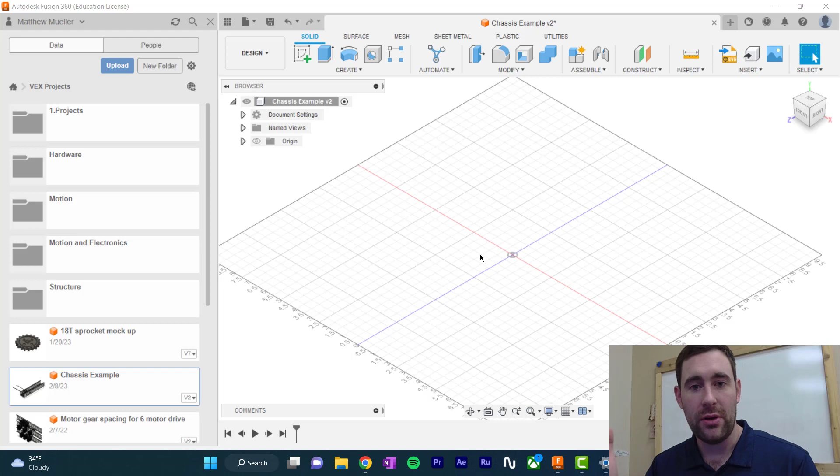All right, so I've got a blank design document here. In this document, we are going to build a basic chassis, just one side of a chassis. The process we're going to go through is we're going to put the structure down first, then add bearing flats, followed by axles, gears, and wheels, in that order. We're going to do that for each wheel on the chassis because this chassis is going to have two wheels. So to start things off, I'm going to start by grabbing my structure.

In my Vex project here where I have all of my metal, I just jump in, grab structure, go to C channel, and your formatting might look a little different than mine, but it's important you have it organized somewhere. I'm going to grab some aluminum 5 by right here, 5 by 35. That'll work. Now I just have to click, drag, and drop.

Okay, so I've dropped it in there. I'm going to move this around here a little bit because I just like this orientation. I'm going to put that part right about there, and hit enter. Now this is going to be my very first part.

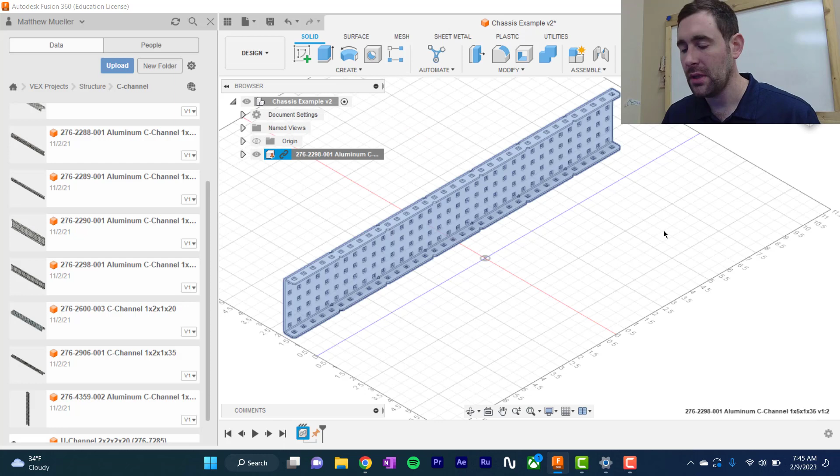Everything else is going to be kind of linked off that part, so I want to ground it. What that means is I'm going to lock that one into position. To do that, I'm going to go into my browser, right click, and go to ground. Now this metal piece is locked in, so if I grab it and move it around, it won't move.

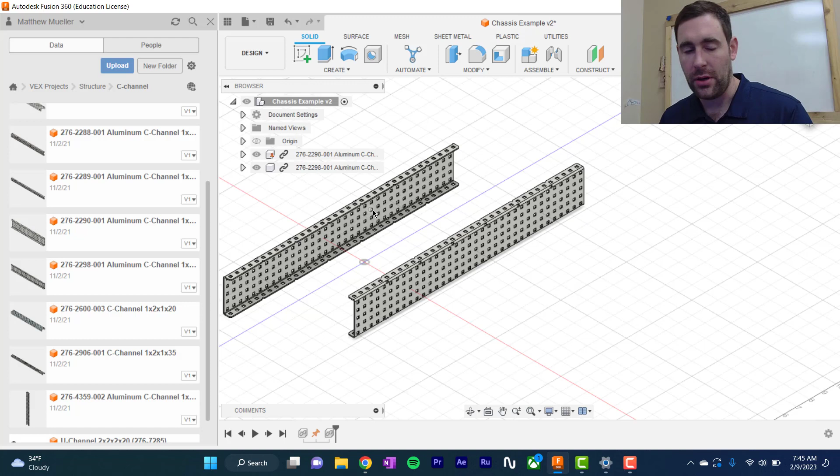If I bring in another one here, again I'm just dragging and dropping from the data panel. I'm going to bring that over here and rotate it to 90 degrees. There we go, looks good. Notice I can just click and drag and move this around—that's the difference between a grounded part and a non-grounded part. So it's always good to have one grounded part so positions aren't moving all over on you.

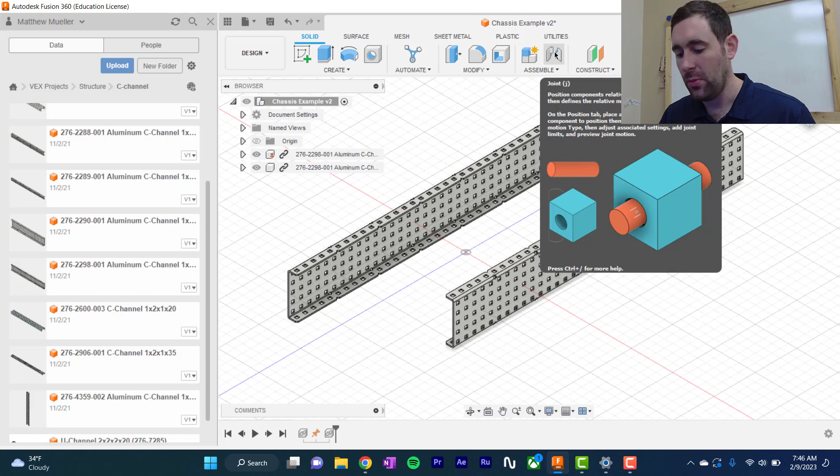All right, so now we need to start putting them together, and this is probably the most important part of the video. To attach two pieces together, you use the joint command. Joint can be found right here, or you can press the J key on your keyboard. I tend to use the keyboard shortcuts all the time—pressing the J key works really well. So I'm just going to press J, and it automatically brings me into joint mode.

Now, in joint mode, the first selection is going to be your piece that moves, and the second selection is the piece it snaps to. So it's always important to select the piece you're moving first. Here I'm going to move this other piece. I'm going to select right here, and notice we have all these little white spots pop up—those are anchor points that you can then match your joint to.

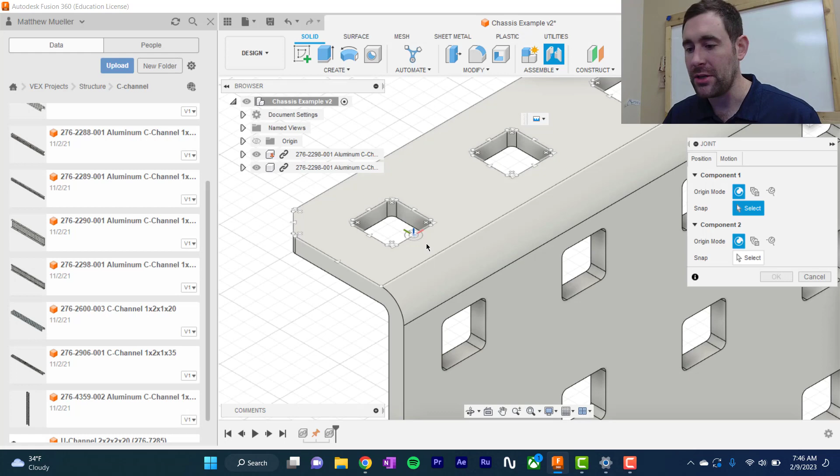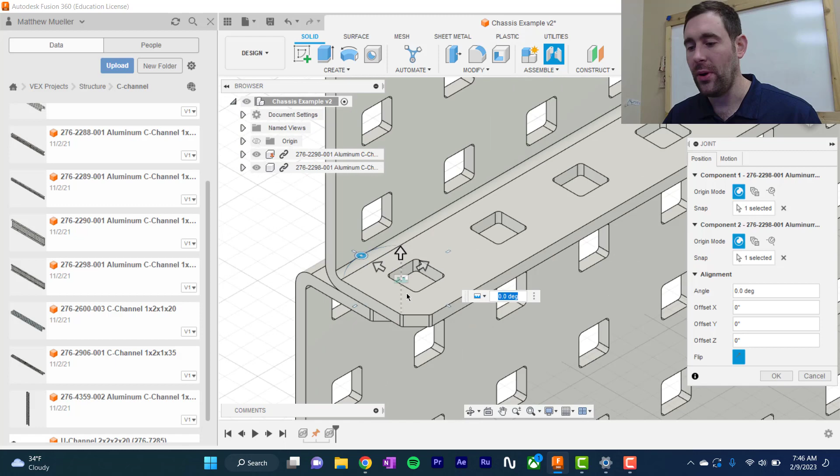I'm going to select that one right there, and it does take some really precise mouse movement, so make sure you zoom in when you do that. So I've selected there, and then I'm going to come over here and select the same kind of spot—we selected the backside here, so I select the exact same spot in reference. The reason I do that is so that when I flip it over, by clicking flip component down here, they line up perfectly. If I orbit around, notice those holes line up perfectly. That's what I want—when they line up perfectly like that, now I can start moving my joint.

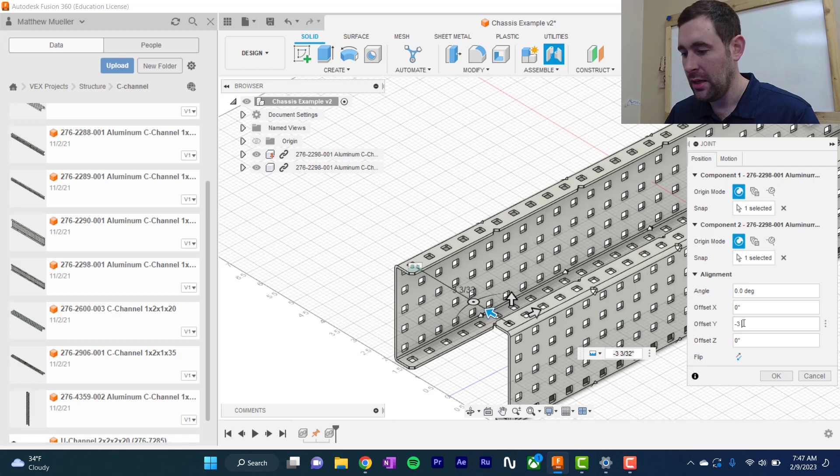Now, when I build a chassis, I need some space there, so what I'm actually going to do is spread these apart, 3 inches. You can just drag it until this gets to 3, or go in here and put 3 inches—I'm doing mine in inches instead of meters here. So there you go, I've got two pieces linked together. Now notice if I click and drag, this one doesn't move at all anymore because it's locked into that grounded part.

Okay, so the next step here, we need to go and grab some bearing flats. I'm going to go to my motion—wrong one, other motion—and go to shaft hardware.

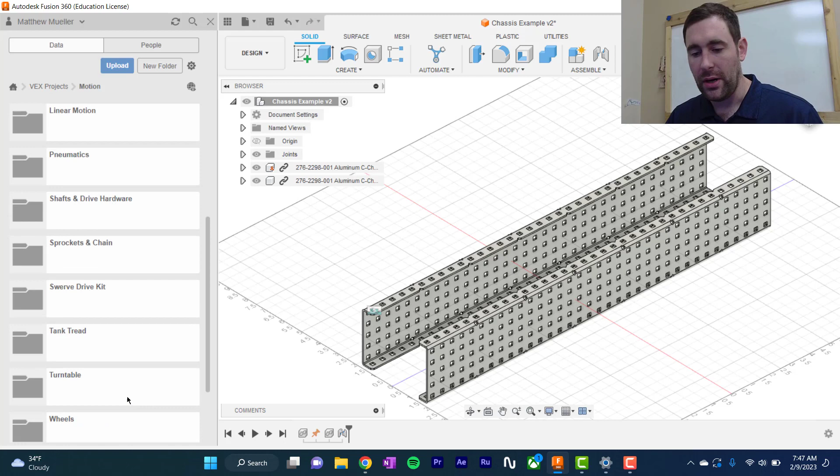And if I let it load and scroll down here a little bit, I will see my bearing flats. That's my narrow bearing flats. We want the standard bearing flats. There they are.

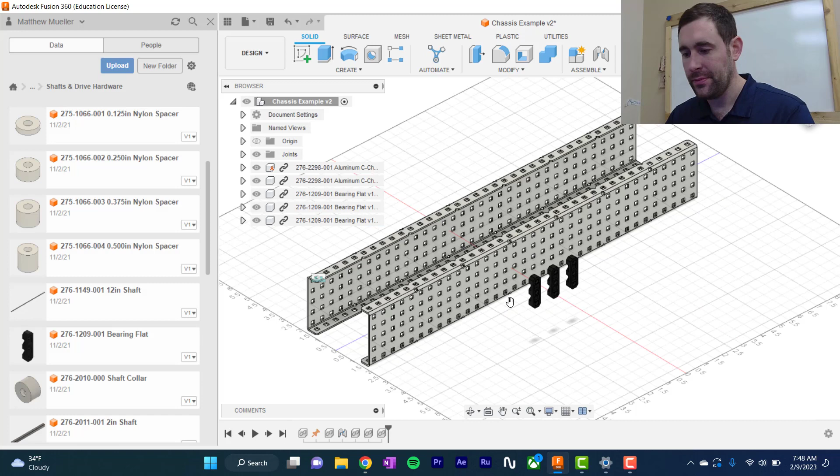Okay, so I dragged those in. I've dragged one in. There it is, that looks good. I'm going to go ahead and make a couple copies of that. So if I just select the piece, Control C, Control V, I can now just make a few of those copies. I'm going to make 1, 2, 3, and so I have a total of 4 bearing flats, and that's going to be perfect.

Now, when I put these bearing flats in, I'm going to take one and mount it to the metal, and the rest of the bearing flats are all going to be referenced from that first bearing that I put in. And there's a reason I'm going to do that, and I'll show you why.

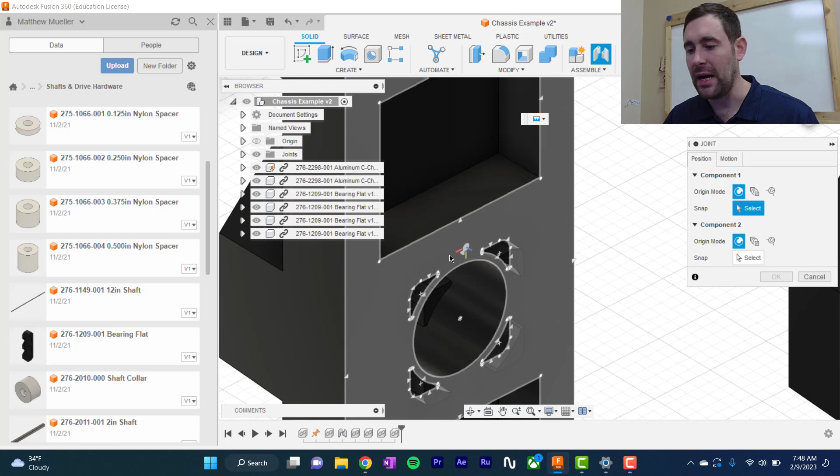So let's go ahead and start with this first one here. I'm going to press the J command. On bearings, there's a really good spot to joint to. Notice how you have these little feet here. These feet here are designed to sit inside of the square slots.

So what I usually do is I select this flat piece here, that anchor, because I have to joint it to something else that's flat. In this case, I'm going to joint it to this opposite chassis over here. So I'm just going to go ahead and pick a random spot here.

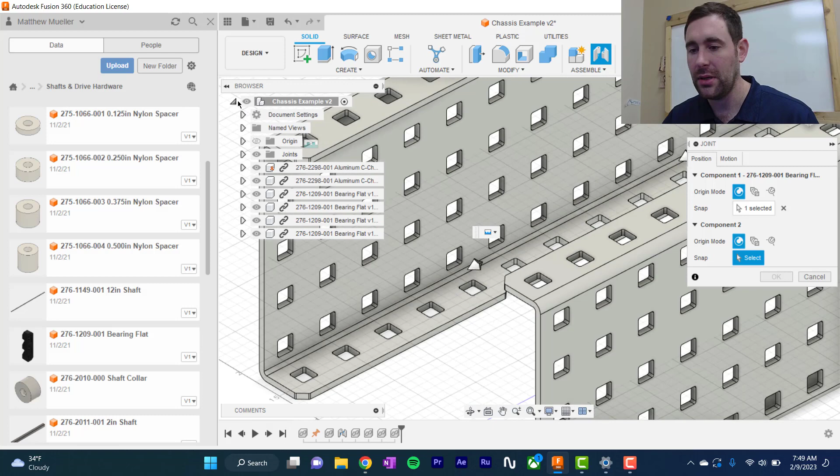Let me go ahead and minimize this so we can kind of see what we're looking at. I'm going to go right here in the middle. I'm going to joint it to this spot right here. And again, zoom in to help you out. So if we notice here, okay, it comes in.

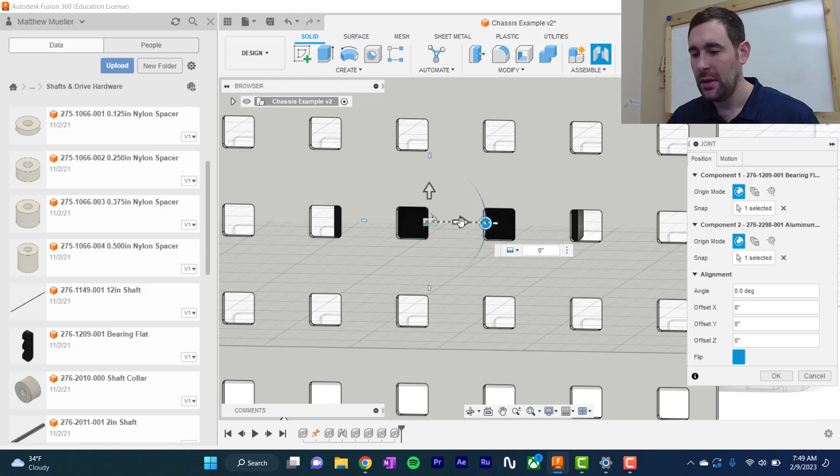I don't want my bearing like that. I'm probably going to do it horizontally. So we adjust the degrees. And now we need to get the holes lined up on the back. So I rotate around to the back side. And we can then adjust this left and right until the holes line up.

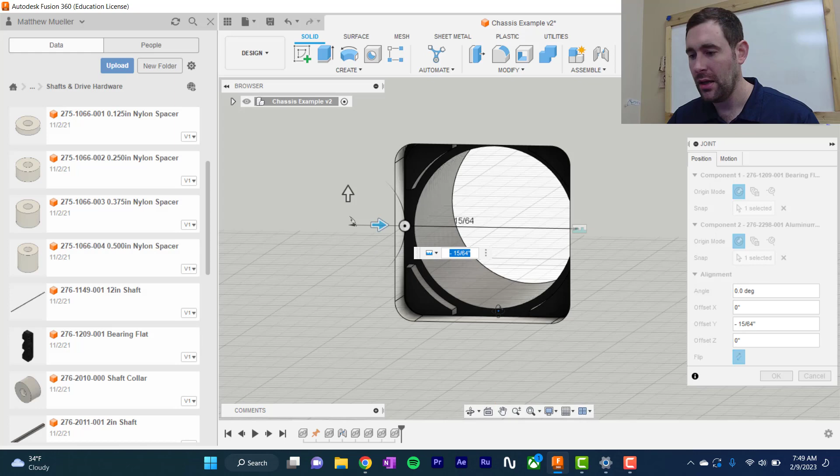Now, if it doesn't seem to be snapping correctly, like maybe it just seems to be off and you can't get it perfectly aligned, zoom in so you can really get fine movements on your piece. And there should be a little bit of tolerance there, like a little bit of wiggle room, and that's by design. So what we have there is perfect. So we're going to hit enter there, and we're good to go.

All right, so now that bearing flat is in place, so now it's time to put the other bearing flats in. So we got to kind of remember, here we can kind of see where the joints are. That joint right there is going to be one we keep coming back to change things.

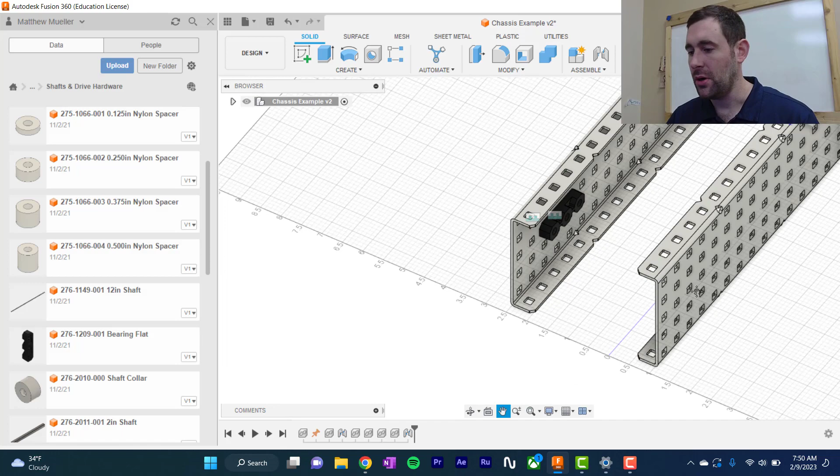So here we go, now we're going to do our next one. Now on the next one, instead of doing the flat back, we're going to do the hole on the front here. So I'm going to do J for joint. I'm going to zoom in on this one, and I'm going to select this hole, that center of the hole there.

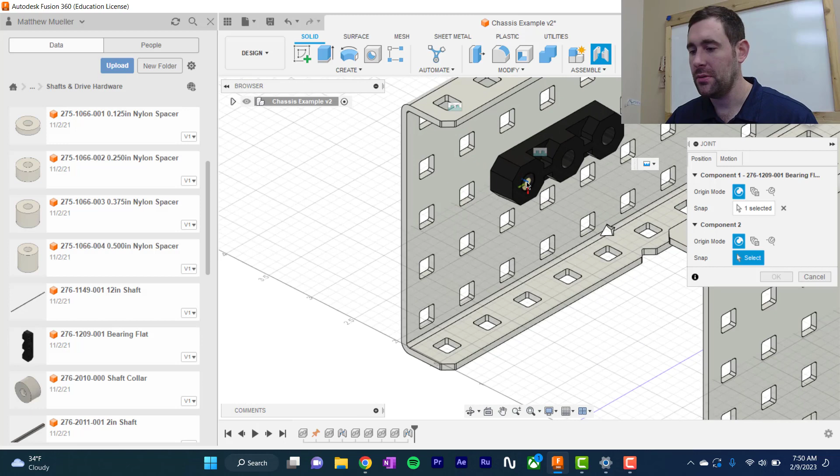And now it's really nice here because what I can do is I can go and select my bearing here. Let's go, there we go. I can select right here. And I can get it all lined up perfectly so it's perfectly aligned. So I know that those holes are going to be lined up.

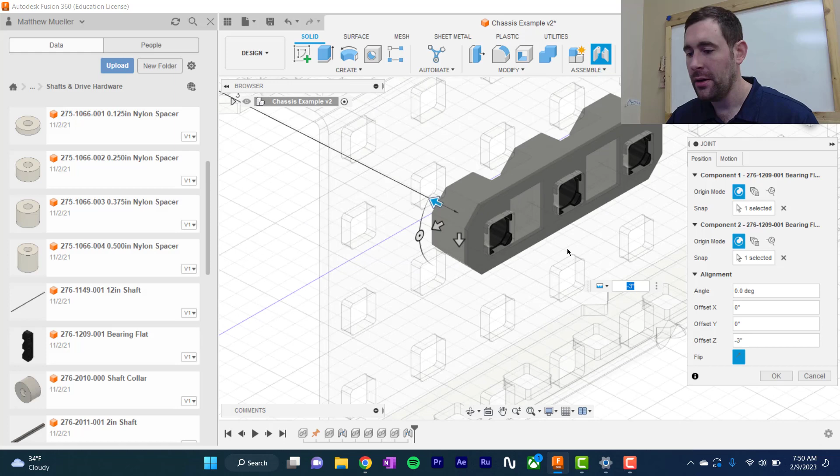And then again, all I have to do is scooch this out to the width of my channels, which I know is 3 inches right there. And if I look here, it's all perfectly lined up. Everything's in the right spot, it's right where I want it. So I hit enter, and we're going to do this a couple more times.

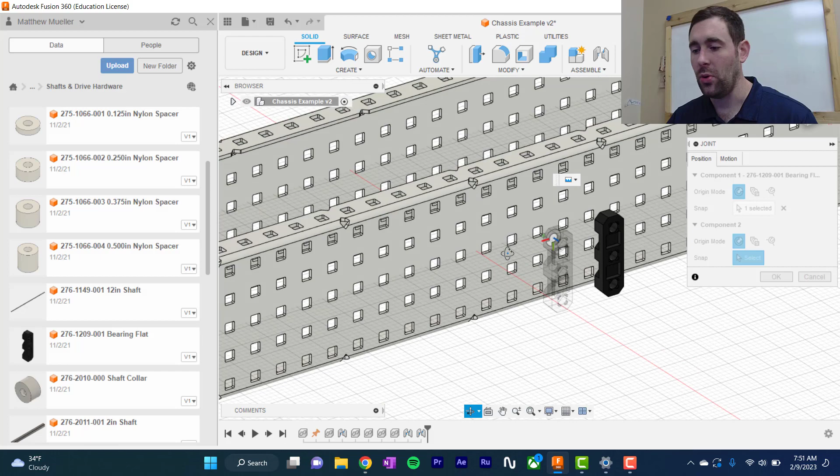So again, we're going to do J. We're going to rotate around. If I haven't mentioned this before, some good commands to know: that middle, you really want a mouse with a scroll wheel that you can use as a third button. I'm using that button to actually pan and rotate.

So if I just click, for example, if I just click it and pull, that allows me to pan. If I hold shift and click, it allows me to rotate. All right, so I went to that one there.

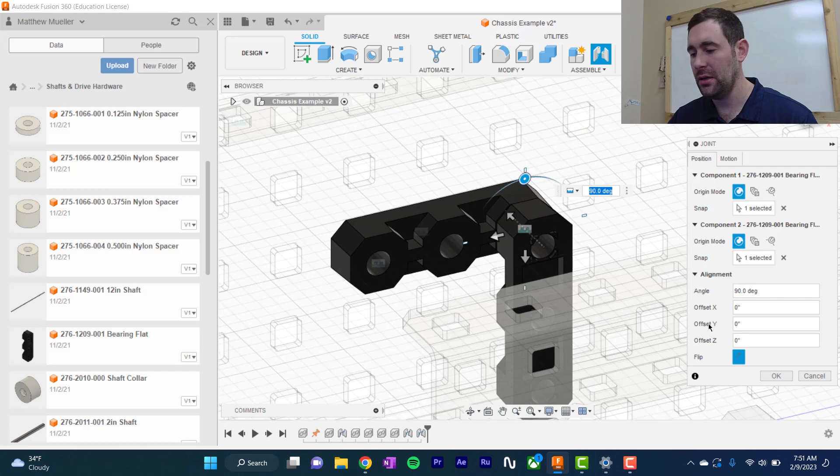And this one we're going to do a little differently. So this one I'm going to flip it because I want to put it on that opposite piece there. I'm going to rotate it to 180 degrees. And I'm going to move this down. I'm going to give it 3 holes of space there, I think.

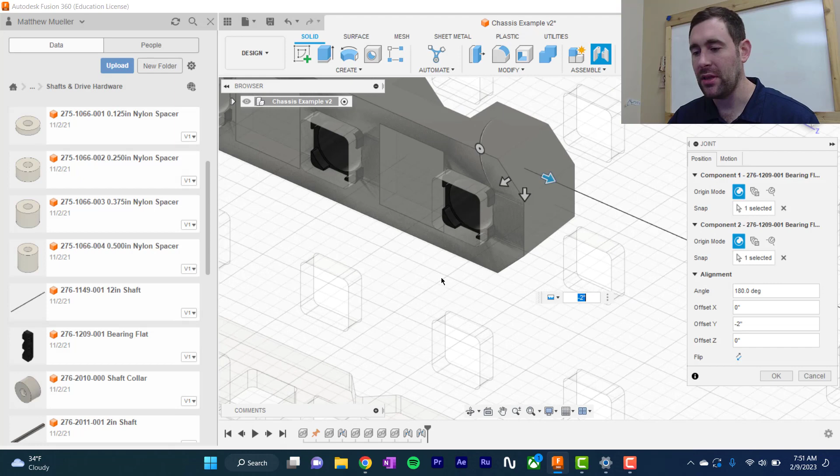So now this one we do need to go line up on the back side because I haven't lined up with the holes. It looks like I actually got that pretty cleanly, it's really close, probably close. Oh, okay, so here you can kind of see it's outside of it a little bit. So we do need to slide it over just a little bit. There we go, it looks pretty good.

My classroom lights turned off on me. Bear with me here.

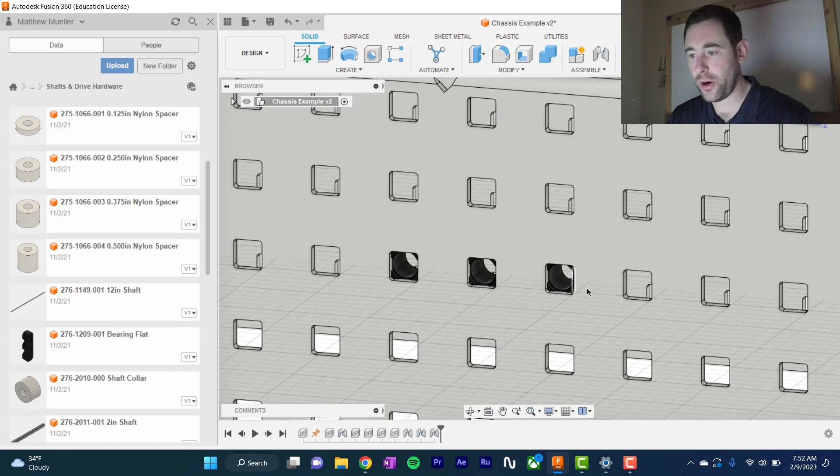All right, so we've got our piece in there. Excellent, so now we're going to do our last bearing flat here. We're going to join it up, and this one here I'm going to join up to this. So I'm going to take this bearing flat and joint it to this one here.

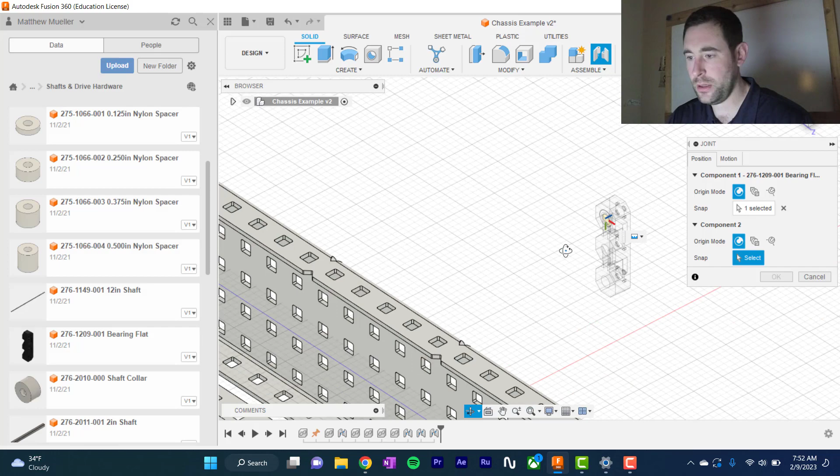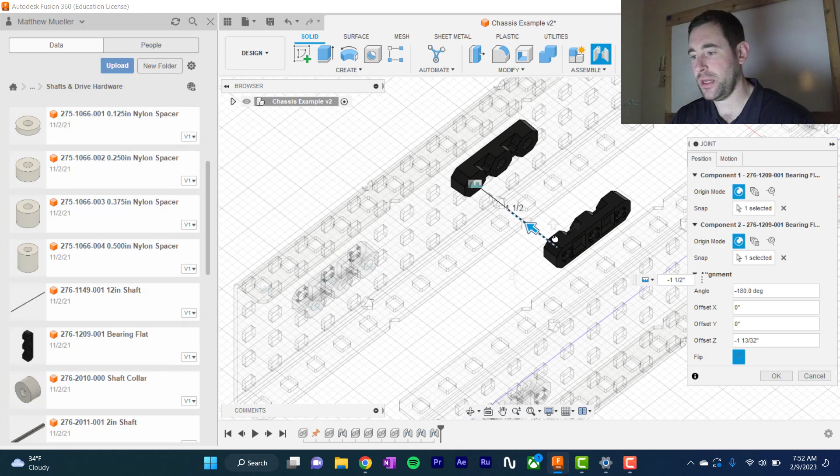It may seem a little tedious. You're just doing the same thing over and over again, but this is really no different than building a robot with parts. You would do the same thing with parts. Here you don't have to worry about not having the parts available, you don't have to worry about running out of parts, you don't have to worry about cutting things. You can do this all in CAD. All right, so we've got these all there.

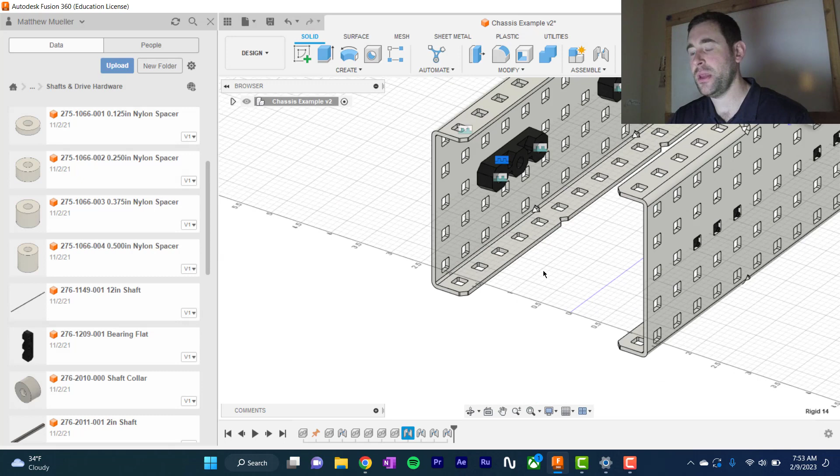Now, why did we do the bearing flats first? Let me kind of demonstrate that piece here. So if we come back, this joint right here was the one that we originally mounted to the metal.

So if I go right click and do edit joint, I can actually move that guy around. So let's say I move it down 1 inch. Notice everything else moved 1 inch as well.

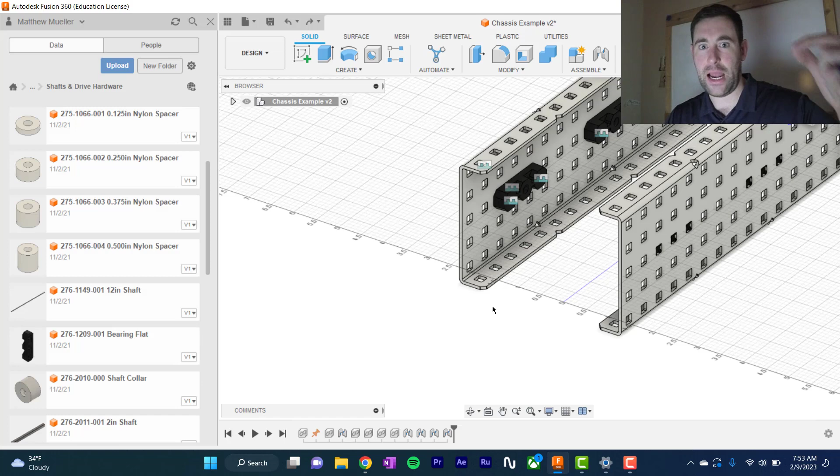So if I build my entire wheel and gear assembly to the bearing reference, I can actually move the entire assembly there without changing every individual piece, which is super handy. So it's really kind of important that you think about the sequence of how you joint pieces together and what you reference them to, especially if you need to change them later on.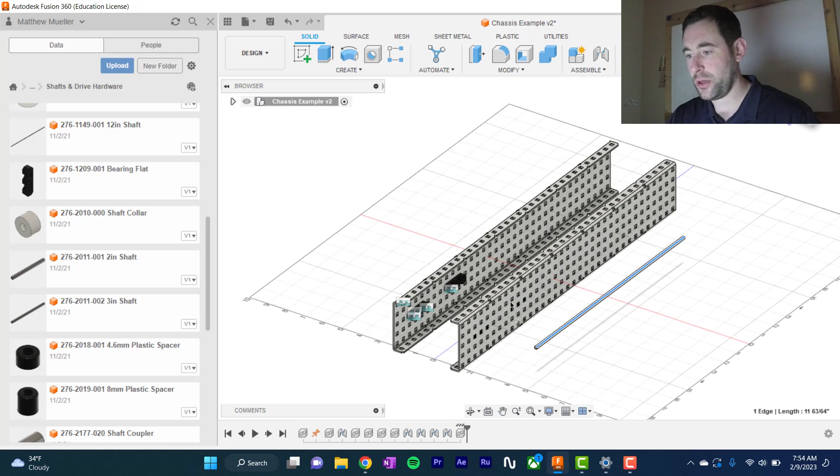All right, so now we are ready to add some more parts, we are ready to add some axles. So I'm going to bring in some 12-inch axles here, I'm going to bring in 2. So there's 1, I'm going to go ahead and move this out of the way. Enter. I'm going to go ahead and bring a second one in, and we're going to bring it over.

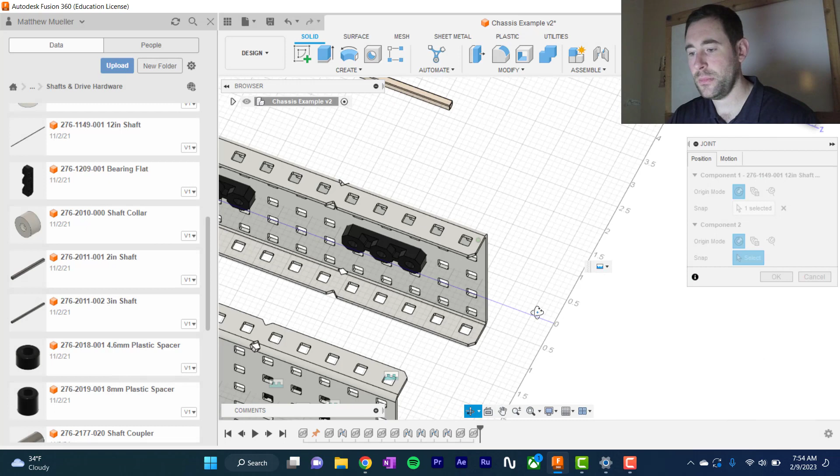All right, and now we're going to joint those in. So I use J, I'm going to select the end here. And again, this is where things get really, really nice. By adding those bearing flats in and getting them lined up, now all I have to do is select the hole I want to go through. So I want it to go through this one right here, so I'm going to joint it to that one.

And now I'm just going to slide it around a little bit to where I like it, because I'm going to have a little bit extra here, which is kind of to be expected. Okay, so there we go, this one's going to be where my wheel is. And that looks pretty good.

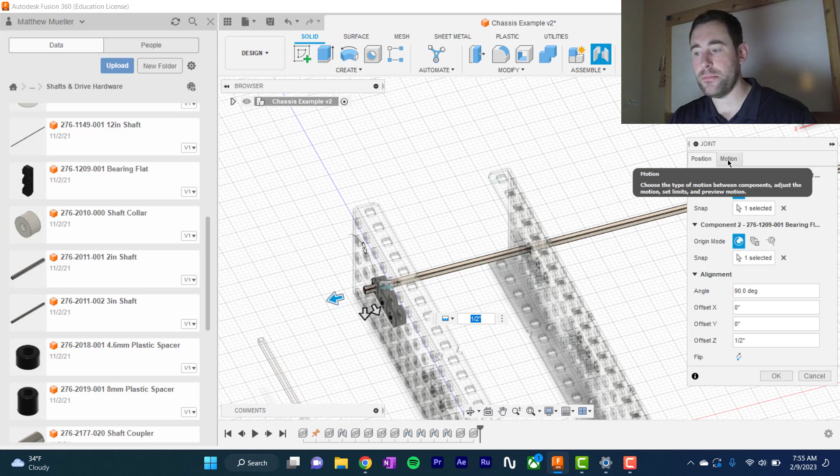Now, there is one change I'm going to make here. If you notice, we have a motion tab here in our joint command, and the motion tab allows us to change what kind of things happen. So for example, if I go to revolute, that's going to allow the axle to spin. There's a lot of different options there you can play with, but if we think about it, we want axles and wheels to be able to spin because then we can actually animate the motion. So we're going to hit OK there.

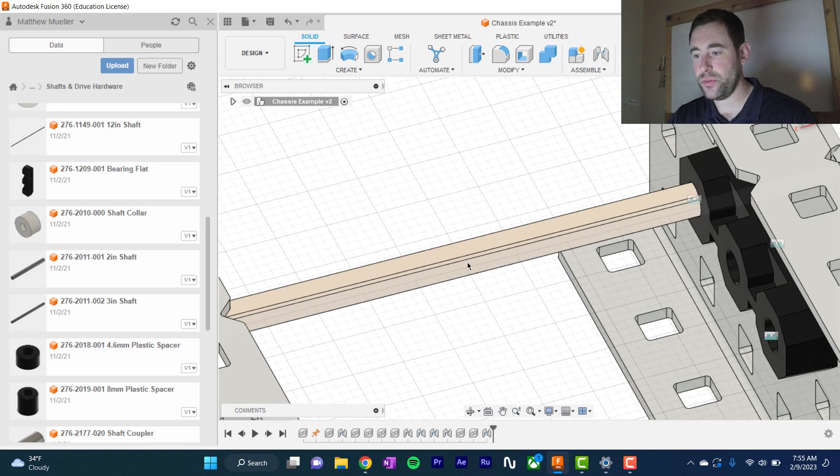So this guy, if I actually zoom in here and grab an edge, notice I can rotate that. Oh, so nice. So we can actually mimic, or simulate motion on our robot before we even build it, which is pretty incredible.

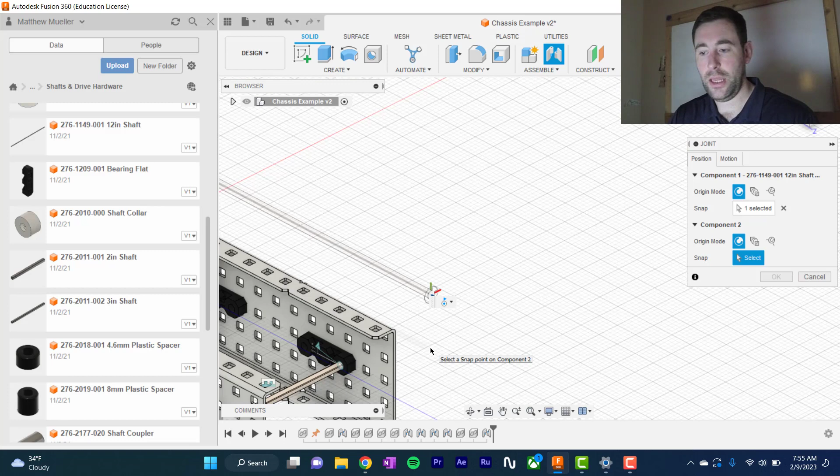All right, we're going to do the exact same thing here with our other axle shaft. So we're going to do J here, we're going to select there, and we're going to go ahead and joint this guy in. All right, so I want to have 1, 2, 3, 4, 5, 6 holes between, so I'm going to do that one there.

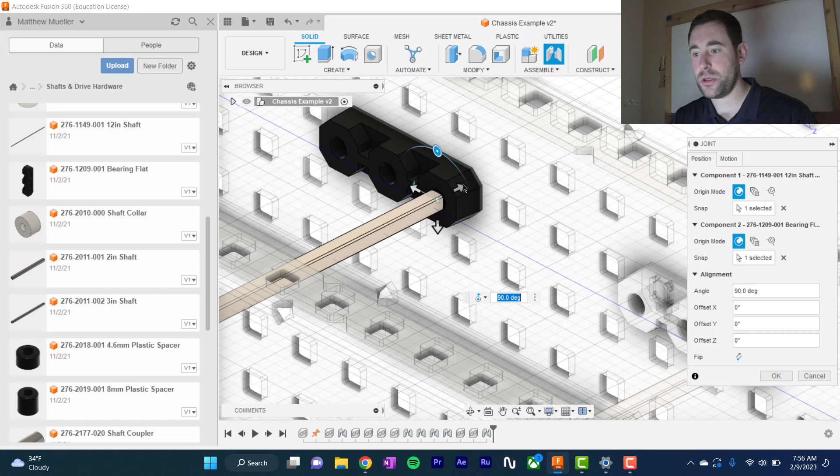And again, so now notice it automatically did the revolute option because that was my previous choice. So it's going to keep using the same joint command you used over and over again until you tell it to do something different. So we'll pull that out a half inch as well.

All right, so now we have 2 axles that spin. Let's go add some gears. I'm setting this up to be an 84 to 60 tooth gear ratio, which should give a 4-inch wheel about 280 RPMs—maybe it's 333, I'd have to do the math again to be sure. Anyways, I just wanted to do that particular ratio for fun.

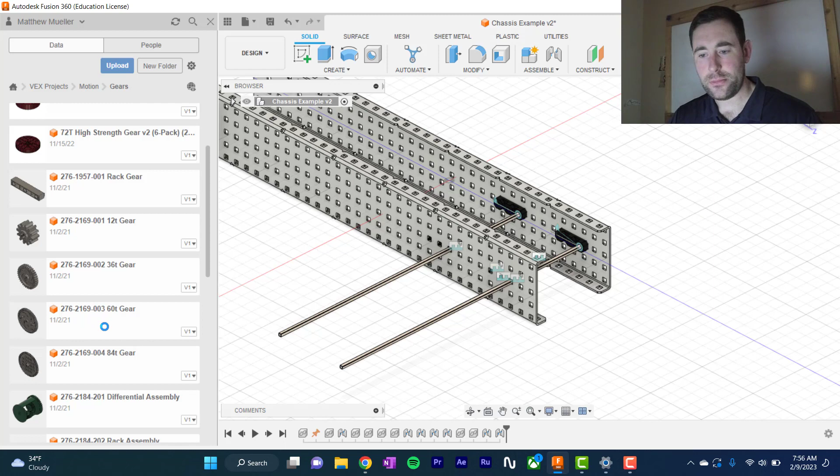All right, so here is my 60-tooth gear. I'm going to drag and drop that in. And here is my 84-tooth gear. Let's move this around a little bit, go over here. And then I'm going to drag my 84-tooth gear in—it's going to put it right in the center. So drag that over there.

Enter. All right. Now, because we made the axles revolute, we're not going to do a revolution on the gear. We're actually going to make that static to the axle, so we're going to do a rigid joint here. So we do joint. All right.

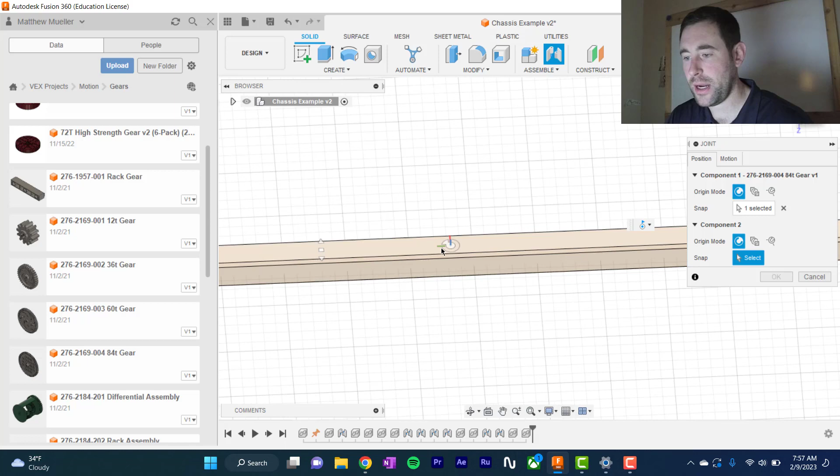So I'm going to go all the way into our axle here, and grab this one piece here. Okay, and then I'm going to come over to my axle. Now this part is a little bit interesting, and you got to be looking for the right thing. On the axle, there's always a midpoint, so right about there—that's usually the spot I like to join it to, unless my ends are available.

Now notice it's automatically doing the revolute. We don't want revolute, so we're going to go to motion here and change this to rigid. Okay, and so now it's right where we want it, or at least it's not right where we want it—we know it's going to be connected.

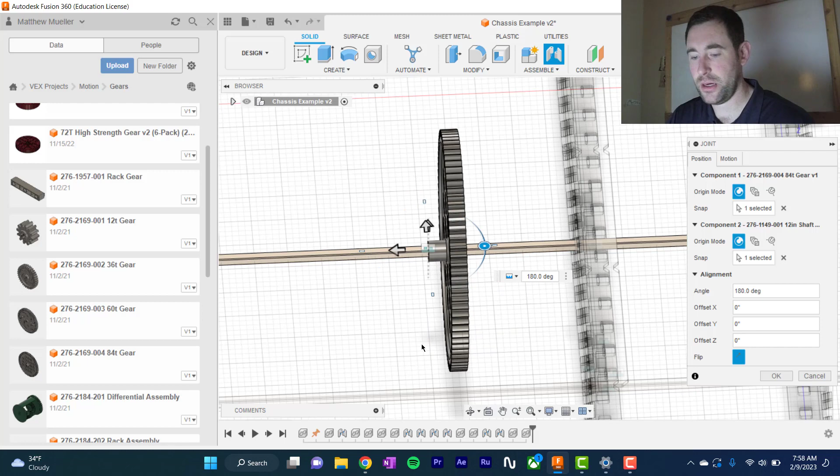So now all I have to do is change my axis here. And if I look here—pan down. Again, a lot of assembly is just moving around and navigating the space. That is exactly how I want it.

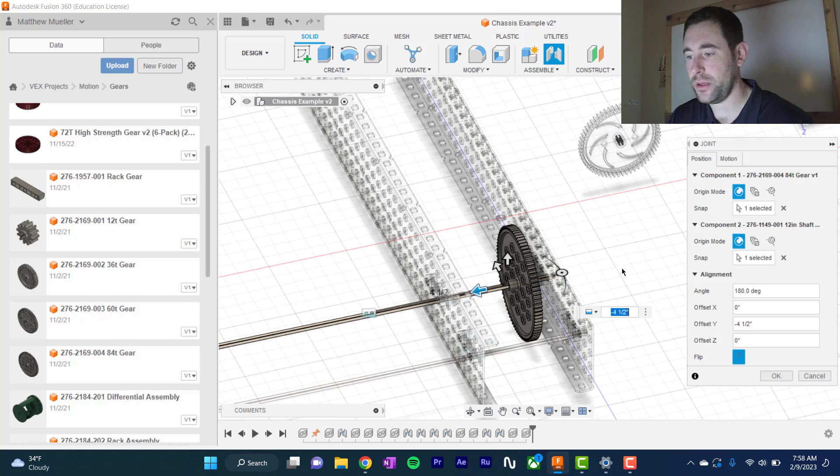All right, so the only thing I have left to do here is scooch it into its spot. I'm going to put this kind of close to my metal here. And that looks pretty good—that's about where I want it, so I'm going to hit enter. Okay, and so now I have my 84-tooth gear right where I want it.

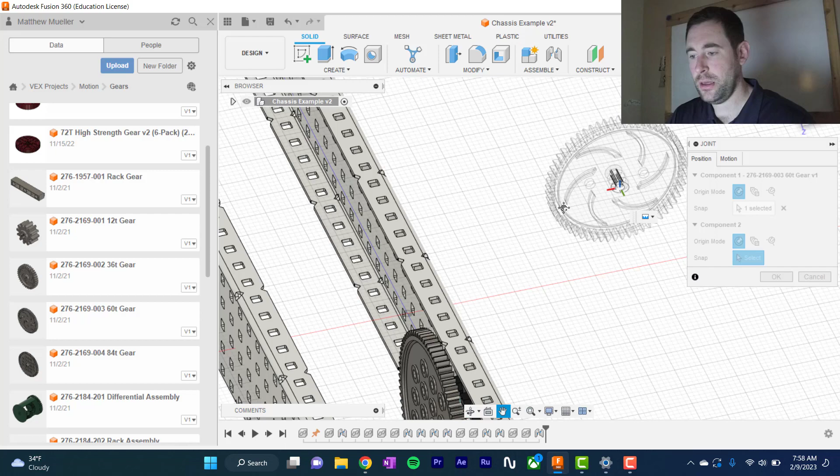Okay, so now I'm going to joint the 60-tooth gear. So I come over here. Again, same concept—we're doing a whole lot of joining today. And this is why it's a really critical skill to have when you're doing an assembly, is you want to be able to do joints.

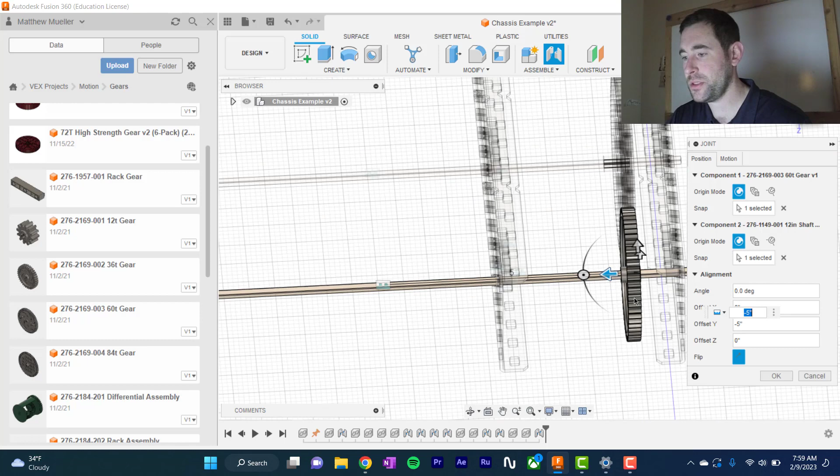All right, there's our square, we're going to do that. And we have to rotate it. So there we go, and we're going to slide it over. Now here it looks about to be the same there. I'm going to zoom in to make sure I get it right. All right, so I can scooch over just a little bit—that's close enough, and we'll hit OK.

Right, so that gear turns, that's all well and good. Okay, let's add our wheels now.

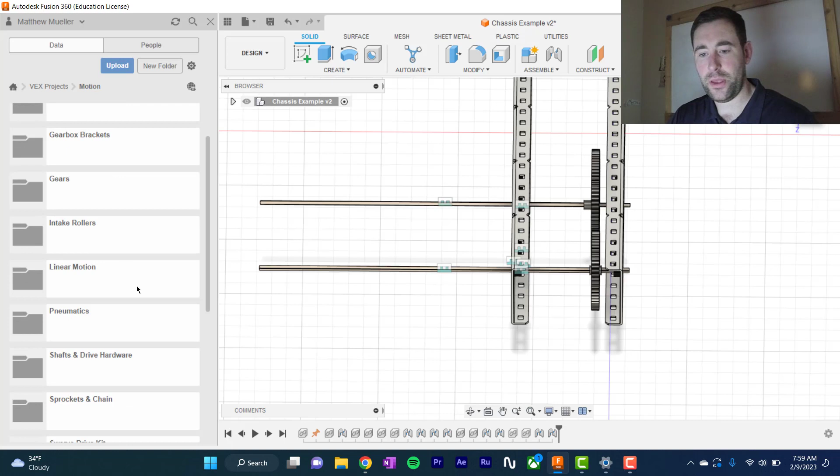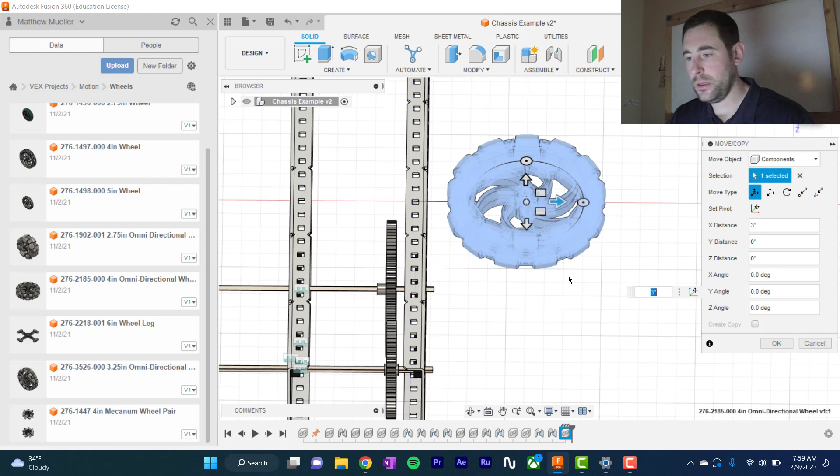So I go back to motion, I go and find my wheels. Wheels are at the bottom here in W, and we're going to add a 4-inch Omni wheel onto this one. So we're going to go down to 4-inch Omni wheel. I'm going to drag that guy in. Drag that in. And I'm just going to hit enter.

Now, we're going to have a little bit of a problem with this particular thing. If I go into my design here, notice all these are cubes, but the wheel we just selected is not. If we open up this window and hit the drop-down arrow, you can see all the different pieces inside that assembly—this is actually a compilation of components, so there's a lot of pieces there. Whereas if I look at the 84-tooth gear, this is really just a body—one body. So we have a bit of a difference there, and we have to do something different.

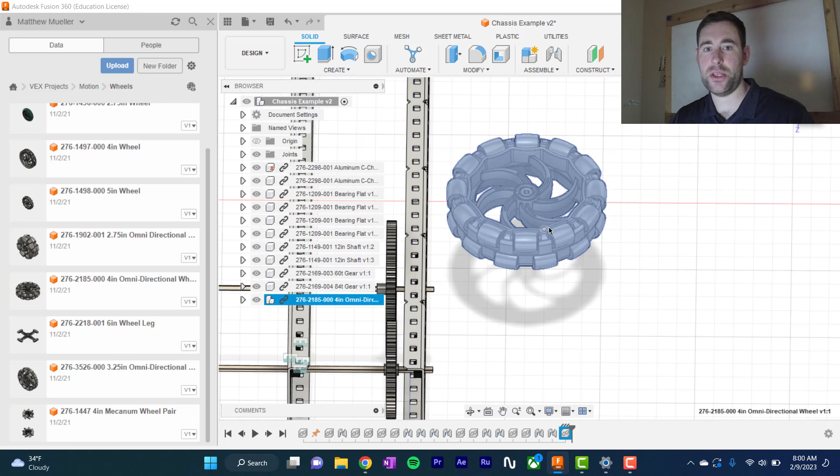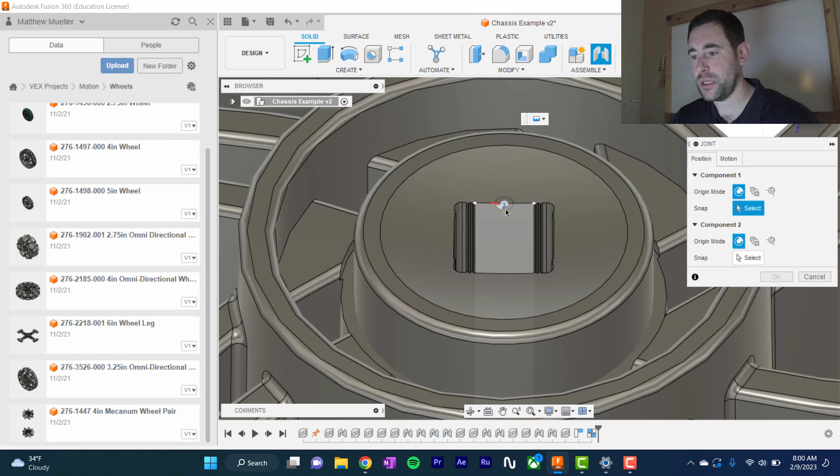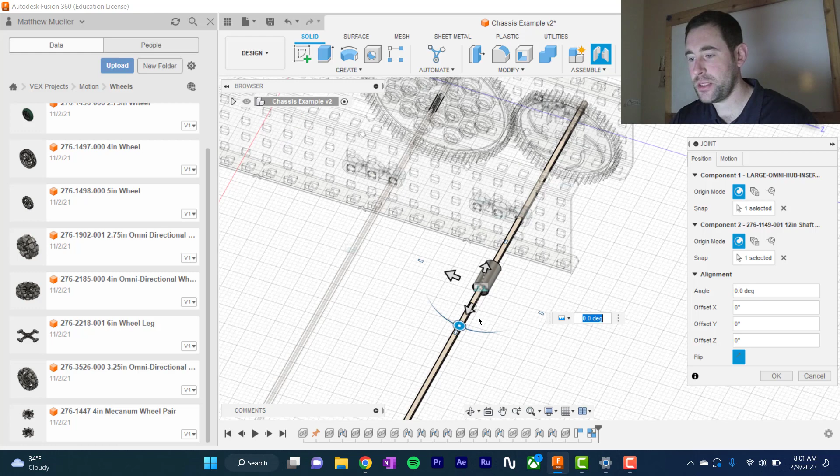So again, we're going to go out to here, and we're going to select our middle point there. Notice it looks like it just brings that center insert, but it turns out it actually does more than that. If we hadn't done the rigid group, it would leave it right there, and we don't really want that.

So what I'm going to do is move this into the middle here, where I think it should go. I think I'm going to need a little more space than that for the Omni wheel. Right there, and we'll hit OK. Now notice the whole wheel comes with it. If I hadn't done the rigid group, only that middle piece would have come, which would have been a real problem.

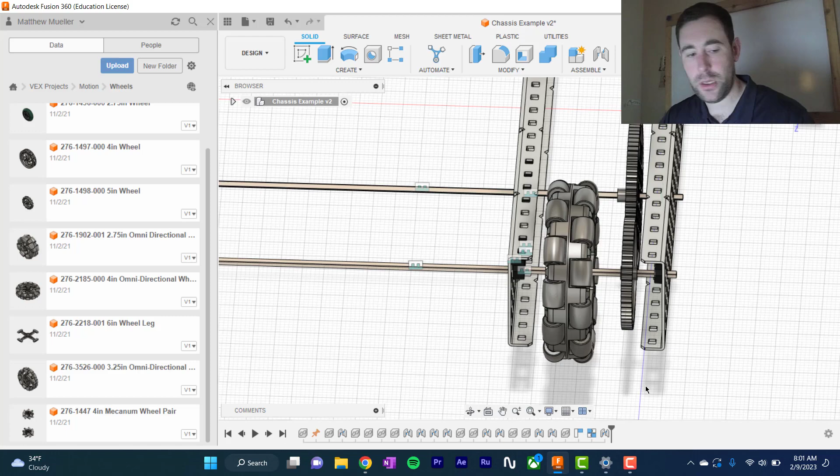So it's a good thing we didn't have to worry about that. All right, so we got that on there. Not too bad. Now, if we're looking at this, we're probably thinking to ourselves: one, I want to put a motor on next, and two, we have these really, really long axles. So those are the last two things we're going to do.

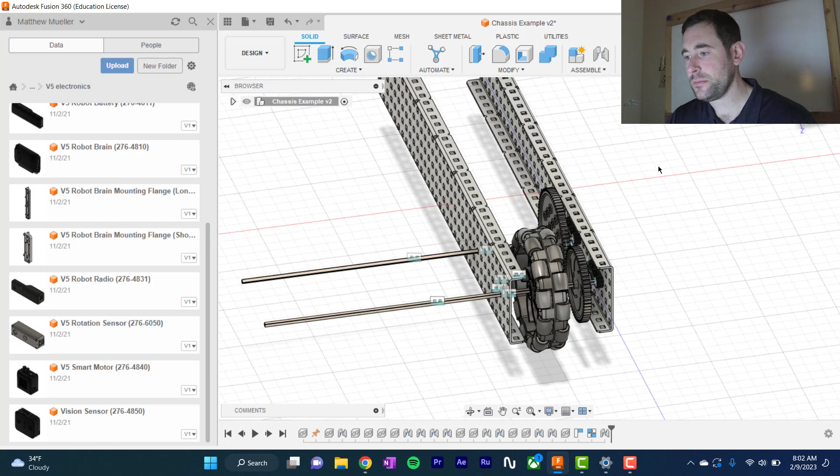So let's grab a motor here, and we're going to use a V5 smart motor. So we go to Motion Electronics, and I scroll down here, I have V5 Electronics, and we can go find a smart motor. A smart motor is very similar to the Omni wheel, where we have to make a rigid group.

All right, so I'm going to scooch this over here. I'm going to move this into space, and we're looking pretty good there. So I'm going to hit OK. All right, now let's do that. Okay, I'm going to undo what I just did there.

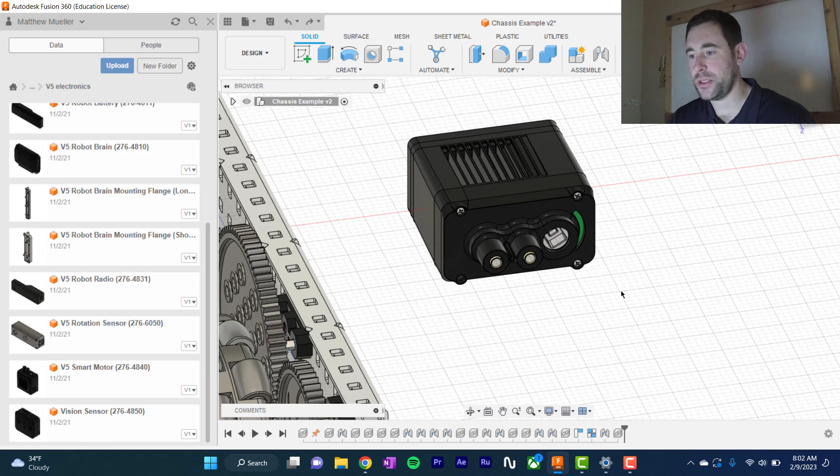All right, now we're going to attach this guy to our piece here. So here, we're actually going to attach the motor directly to the bearing. I'm not going to attach to the axle. The reason I'm not going to attach to the axle is that axle can move. I don't want the motor to move in real life. I want that motor to be rigid in its spot.

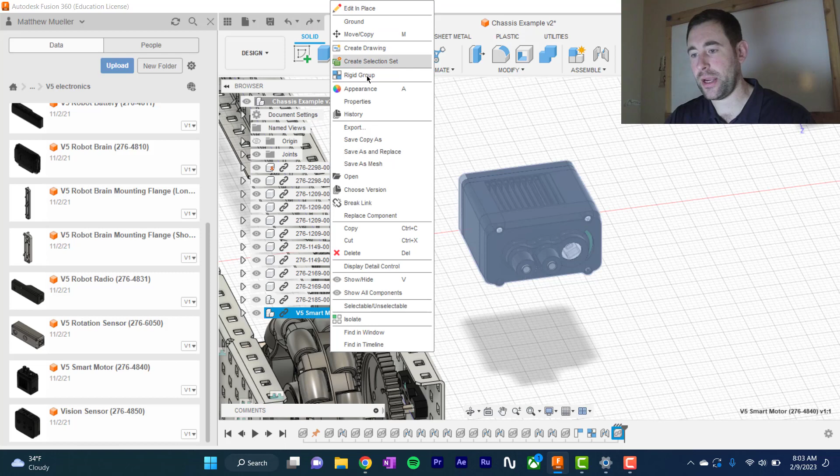So all we have to do is first select our motor. Notice that's an assembly, so we click on it, right click, we do rigid group, and we hit OK. And now we can do the J command. Let's go ahead and do this outside one here. So we're going to select that center there.

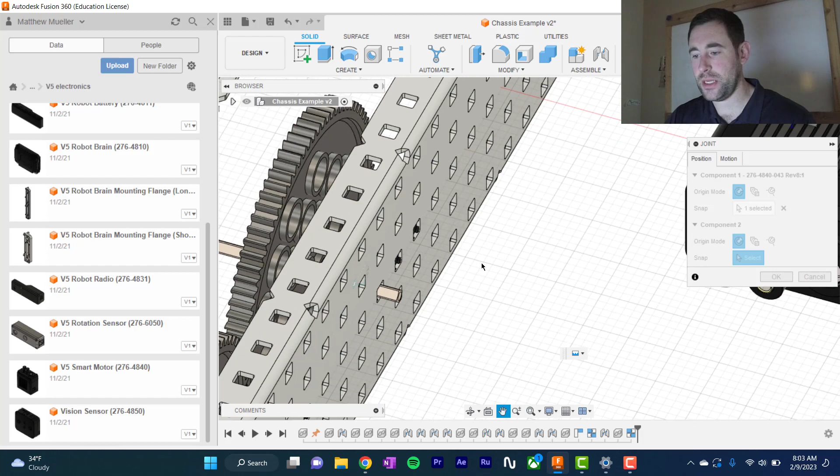Now this is a little bit tricky, and I need to find a better way to do this, but right now this is the best I've got. So I'm going to joint this to the bearing just for the sake of argument. I could do it to the metal as well, but I'm just going to do it to this central hole because I have it there. It's nice, but you probably wouldn't do this in practice because these feet here are going to run into this guy here.

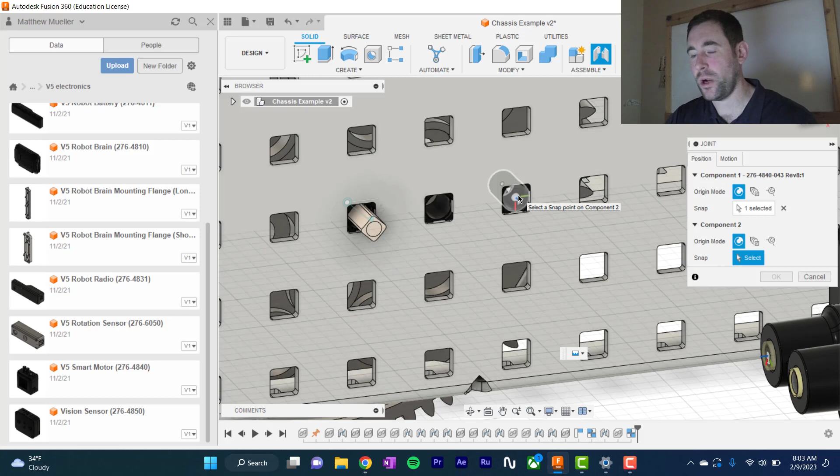So we can actually do it either way. If you wanted to do it to the bearing, you just link it to the middle. If you didn't want to do it to the bearing, like if I wanted to put it on this side, I would link it to one of the edges, and then I just have to adjust it. So let's go ahead and do it over here. Let's follow best practice and put it not on the bearing.

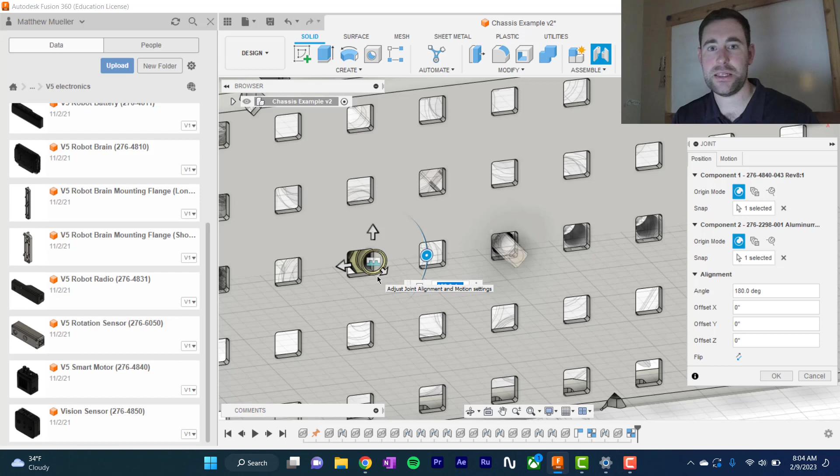Okay, so notice there it just brought that insert. If you've ever taken a smart motor apart, there's these little standoffs with threaded insides. That's how you actually screw your screw in. That's what we have there. So I'm going to go ahead and flip this guy because I want it on the outside.

And then I'm going to shift this guy over a little bit. We kind of need to get an eyeball inside there, and this is where it's kind of hard to see. Actually it looks pretty good. All right, so it looks good. So we're going to hit OK.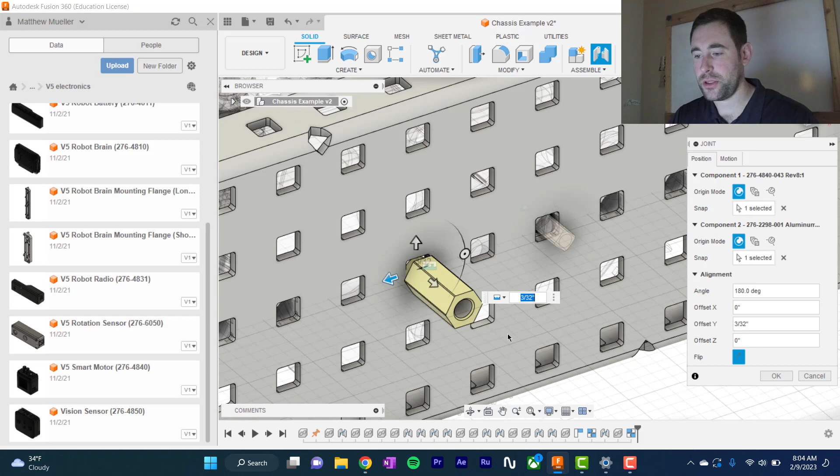And now notice it brought it over and it put it funny. The reason it does that is because it's hard to see the orientation of that standoff in there. So one of the things you have to do here is place the motor, and then you got to guess, check, and see, okay, where do I need to rotate that. So we need to rotate that pretty badly to the right there. So we just go to our joint, we just need to edit.

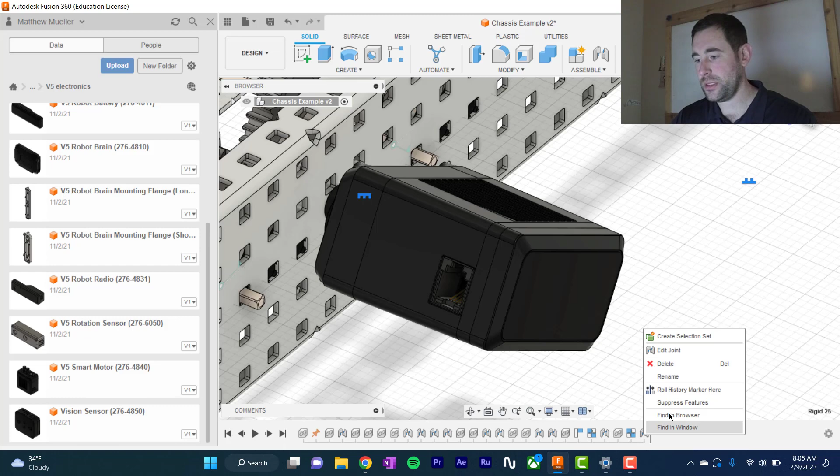So we come over here, joint, you edit joint, and we just rotate this. I'm going to guess, let's try going to 0 here. Because it was at 180, it was quite a bit off. All right, so it looks like we need to go up a little bit.

So escape there, go edit joint. Let's go, I'm going to go to about 15 degrees. Let's try 15 here. Okay, getting closer. Might be 25.

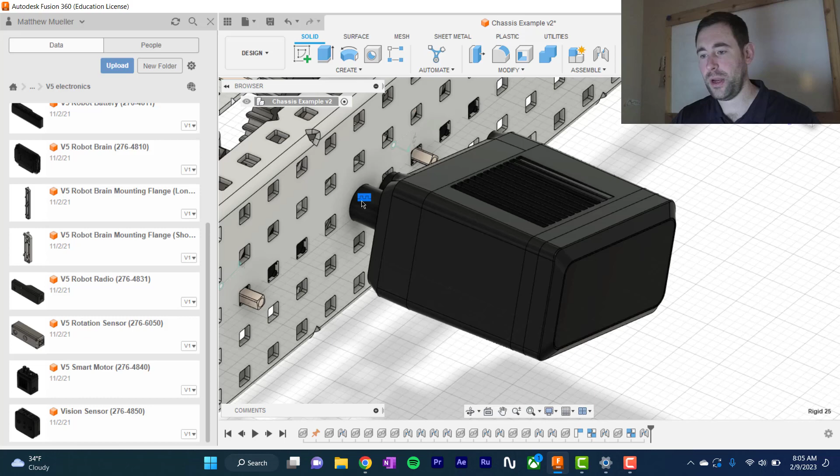Thankfully, you don't have to, there's only, for a competition robot, there's only 8 motors that you'd be putting on.

All right, looks like we need to go to 30 degrees. So you don't have to do this too many times. And you'll kind of notice that there's a pattern. It's usually like the same degree measure every time. And there it is, 30 degrees was our magic number.

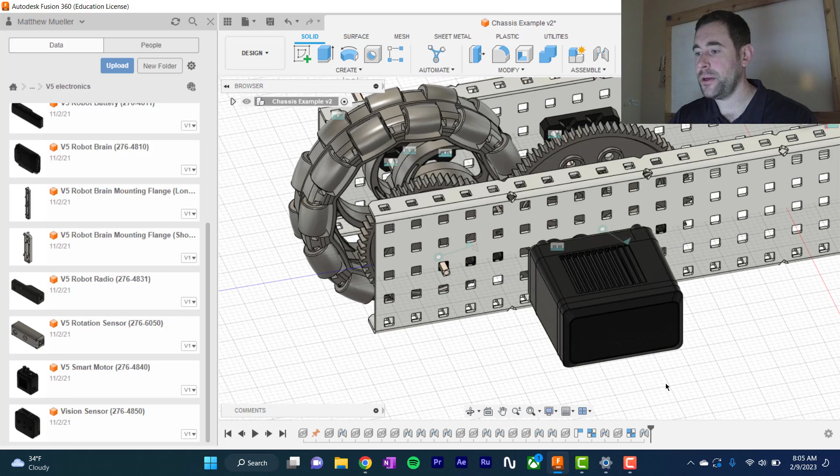Okay, and so now we have a motor on there. All right, we don't have the axle going through yet, so that might be something we would change. So for example, all right, I want to go back and change that.

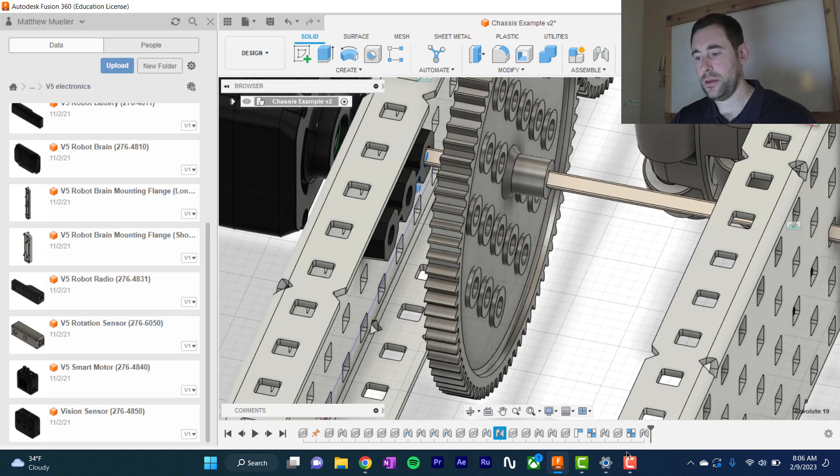Well, all I have to do is go to, let's see, we jointed the axle behind our gear here. There's our revolute joint. So if I click on that revolute joint, I right click. All right, let's see. So notice it also holds it down here in the bottom in your timeline. So we can do edit joint.

And so we can actually increase the slide here. So maybe I'm going to give it a full inch. Hopefully that's in the motor at this point. Yeah, that looks like it's in the motor. So now I know I have plenty of slack on that axle to build this.

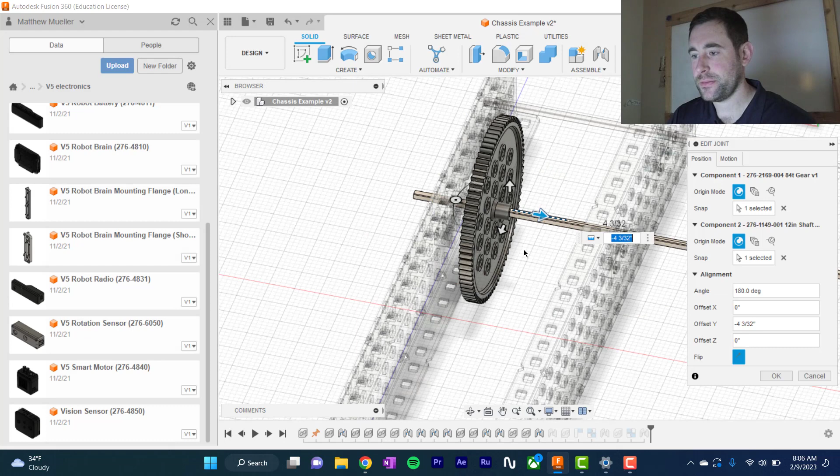Notice it did move the gear, so we need to adjust. I believe that's this joint here. So we need to go edit, and we need to slide this back. It looks like we need to do that a little bit more there. So another, we'll go 4 inches. There we go. Okay, that looks pretty good.

Okay, so now we've got these pieces together. It's coming together. It's starting to look like something. We have an idea of where our spacing would be if our spacing is right.

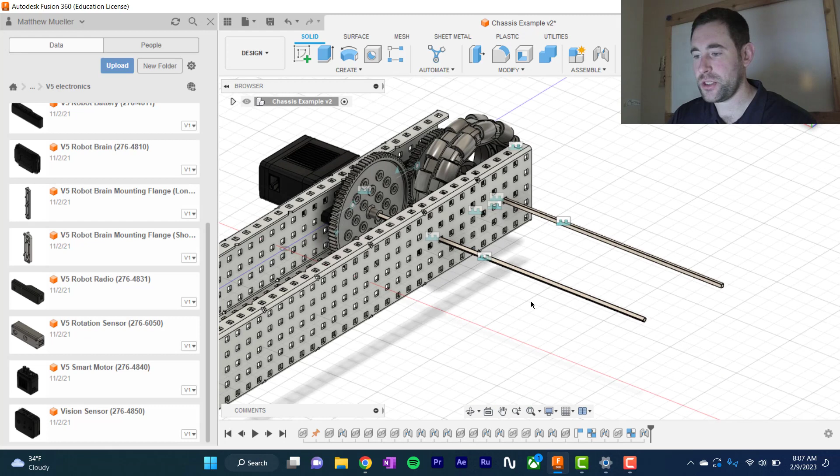And so now what we're going to do is we're going to trim these. So these axles are too long. So this is the kind of the last thing we need to do. So I can go ahead and close this.

So whenever you want to trim an axle, or you want to trim any part at all, if you want to make it smaller, all you have to do is open up your browser, and the first thing you have to do is you need to select the 2 parts that you want to cut. Most of the time you do this individually, but we're going to right click here.

And we're going to click break link. So what is currently happening here is Fusion is going out and grabbing the file from somewhere else and essentially linking the 2 together. So it's saying, hey, I'm using this file here. If I want to make a new part or a custom part, I need to break that link so that I can then make the part.

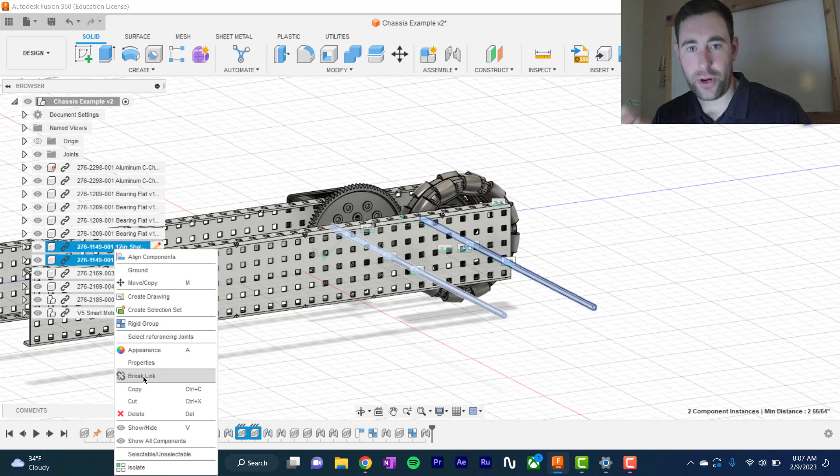So we hit break link here, and then we are going to do a 2D sketch, and we draw a sketch right on the end of our piece. And so I'm going to draw a circle here. So right from there, I drag it out.

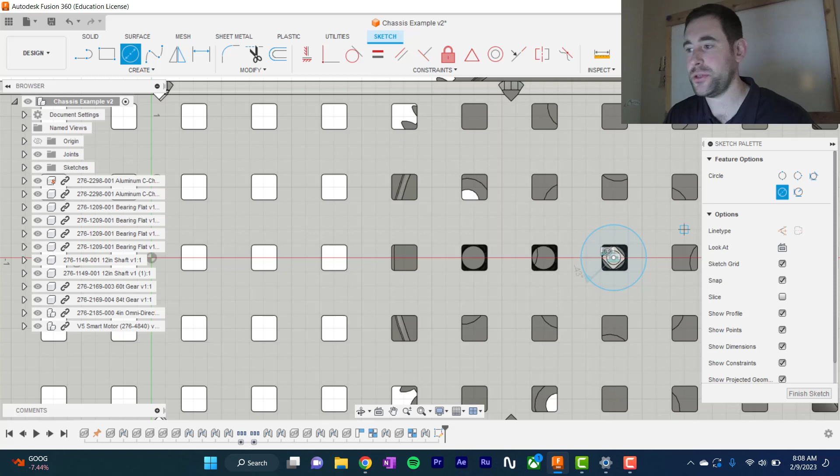It does not matter the size. You do not need to dimension it. You just need to make sure it's bigger than the object you're cutting. So then we hit finish sketch. So then I'm going to rotate to the side a little bit so I can see things a little bit better.

And now if I use the E command, which is extrude, I can select my circle there. Make sure you select the inside one because it's always going to make 2 sketches there. And then you just drag it in and you cut it.

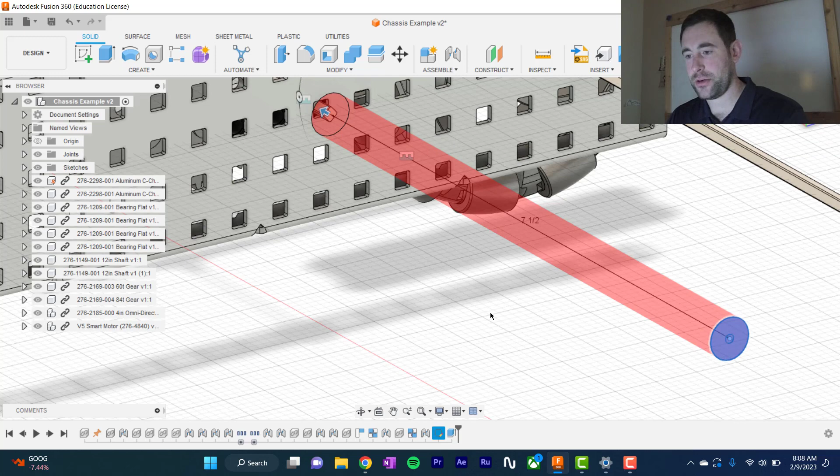So we're doing a cut command. And so I just bring it there and I hit enter. And boom, it's good to go. It's been cut. Do the same thing over here.

We could have done that in one sketch if we wanted. I tend to like to do things, like when I'm cutting pieces, I like to cut pieces individually. Not much different than if I were to do it in real life.

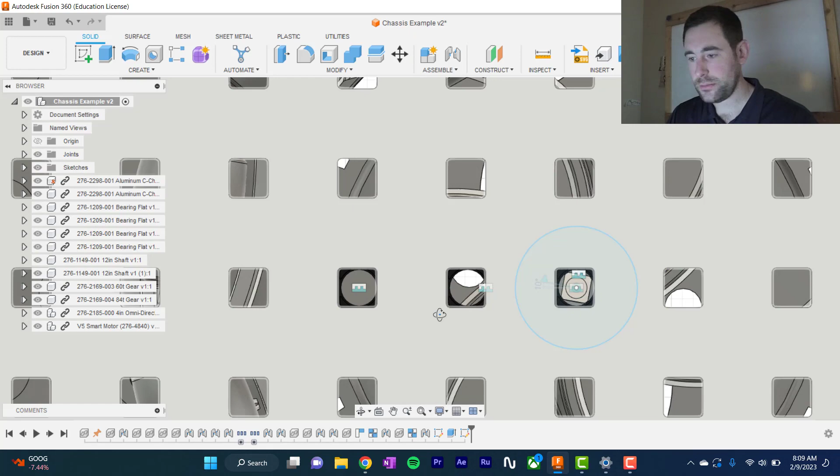Finish my sketch. Zoom out. And we cut. So extrude. Click here. Click my inside one. Click my outside one. And cut. And I hit enter. And now we have a shortened axle.

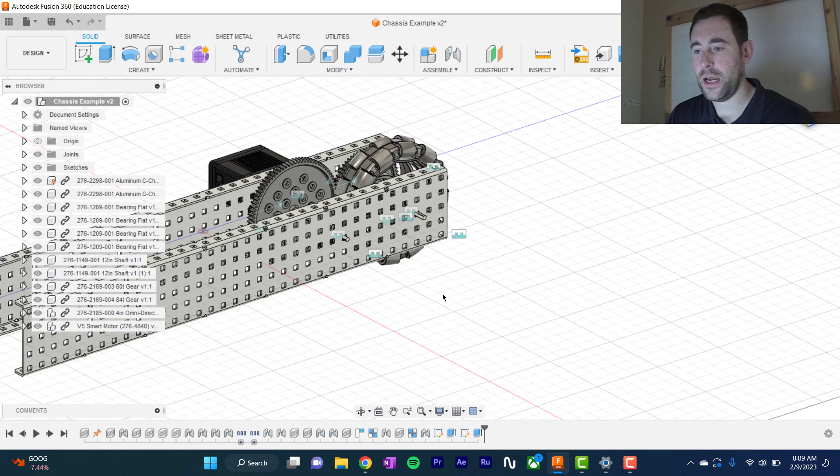And that's it. We've made half of our chassis. So now try building the other half of the chassis on the other end of your structure.